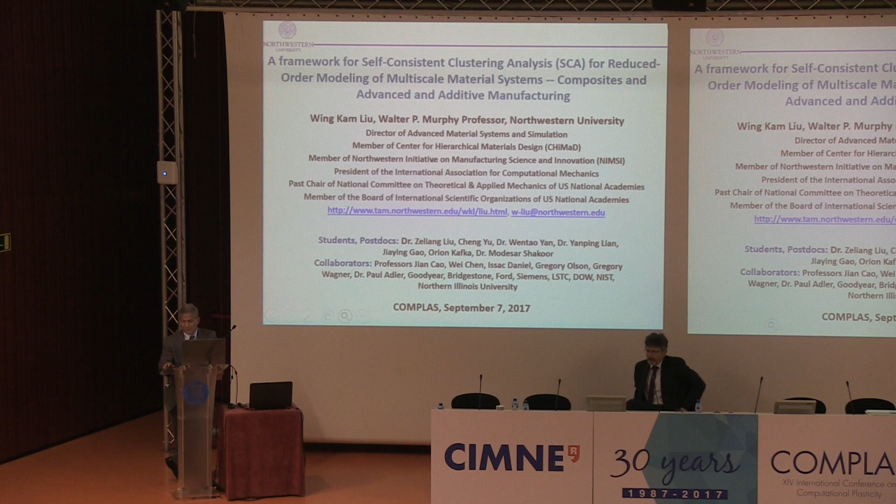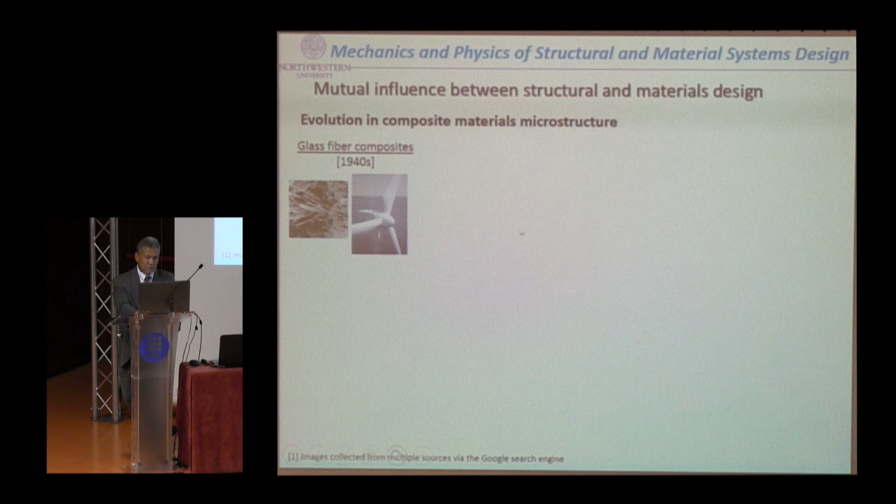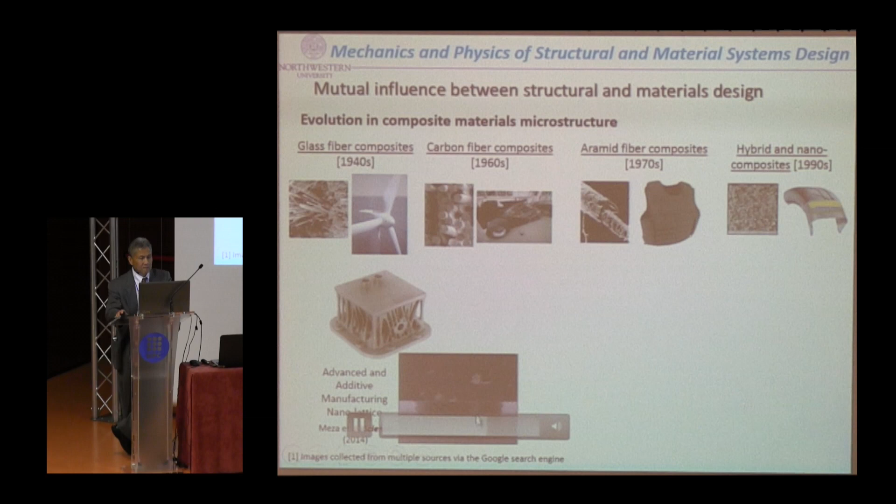So I will give you some idea what it means, how mechanics and physics can apply to microstructure systems. You can see the evolution of composite material, how they evolve as a function of time. You start from a traditional material, I wouldn't call it too traditional, say fiber composite, all the way to nanocomposites. And now we really want to look at the nanoscale using additive or advanced manufacturing technology. This one is based on work done by Caltech, and the diameter of this truss system is around 10 nanometers, a very, very small scale system.

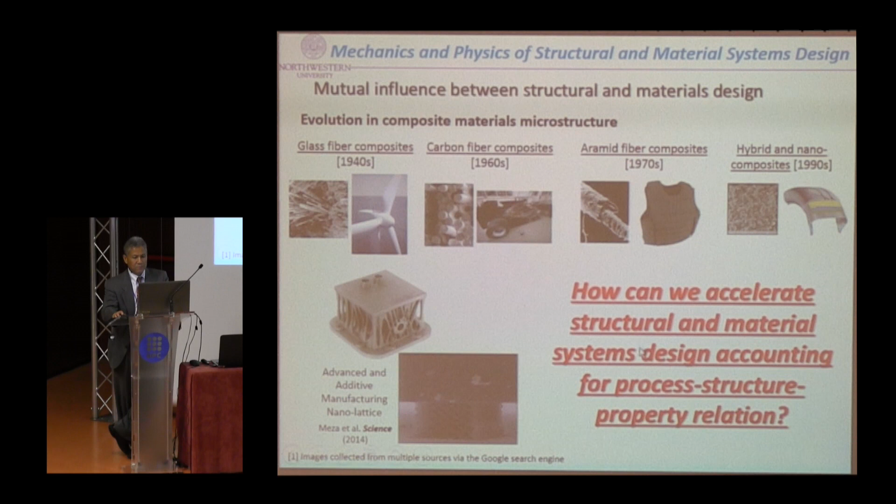So the question would be, how can we accelerate structural and material system design accounting for process structure property relations? That's the goal of my talk.

So I will start with talking about something called the data-driven approach. This is a theory that we borrow a lot from micromechanics called self-consistent. The clustering is a lot more based on imaging technique, data compression techniques. We're going to combine both of them together to demonstrate how we're going to look at microstructural response based on large deformations and so forth.

Of course, this creates a lot of data. I know that data may be a buzzword, but I believe there is a good application in mechanics or material science because we are focused on process. If you change a process, you get the microstructure, and the microstructure will change your properties. So that creates a lot of data.

In fact, when we talk about material, basically it's a database. That's the reason why we talk about data, because you cannot just make it up. It depends on how you process material based on thermodynamics, what composition. It has to be a material database so that you can use the information to predict the microstructure.

So the objective would be, if you have such a complex data structure, how can we effectively and accurately predict the nonlinear history-dependent response of this heterogeneous complex microstructure? But because this is so small, uncertainty quantification is very important because you cannot just do a deterministic approach. You have to go to a statistical approach in this problem.

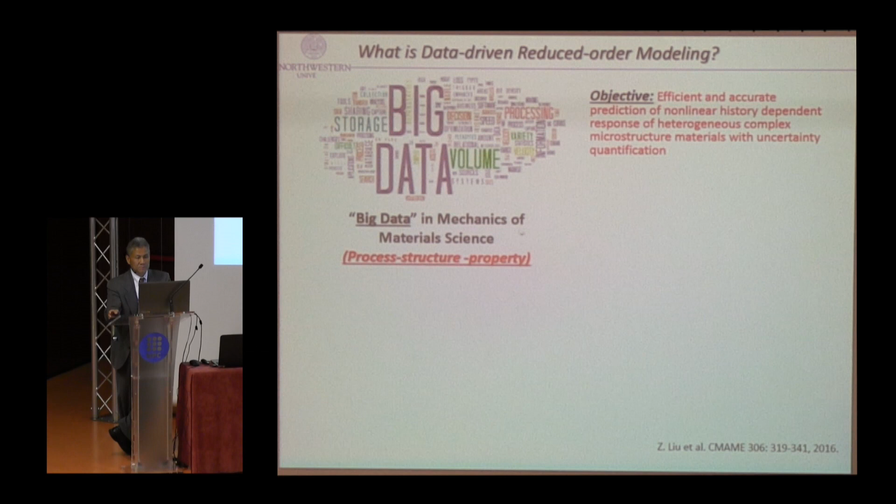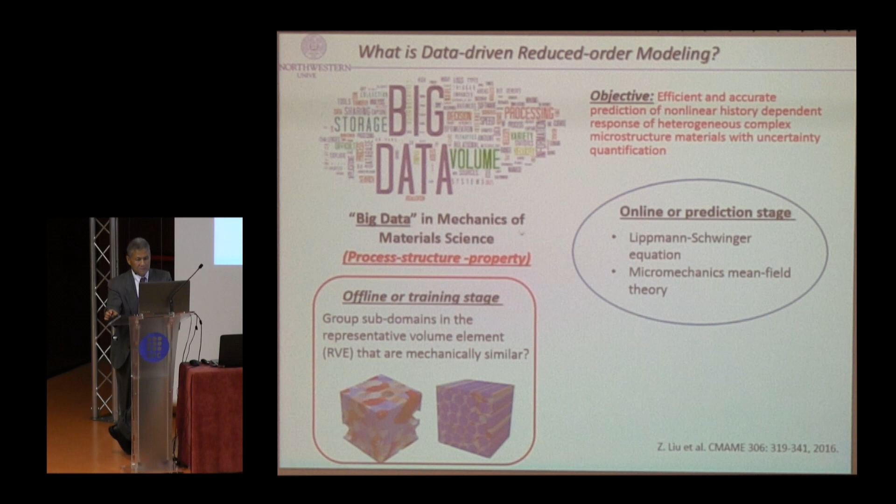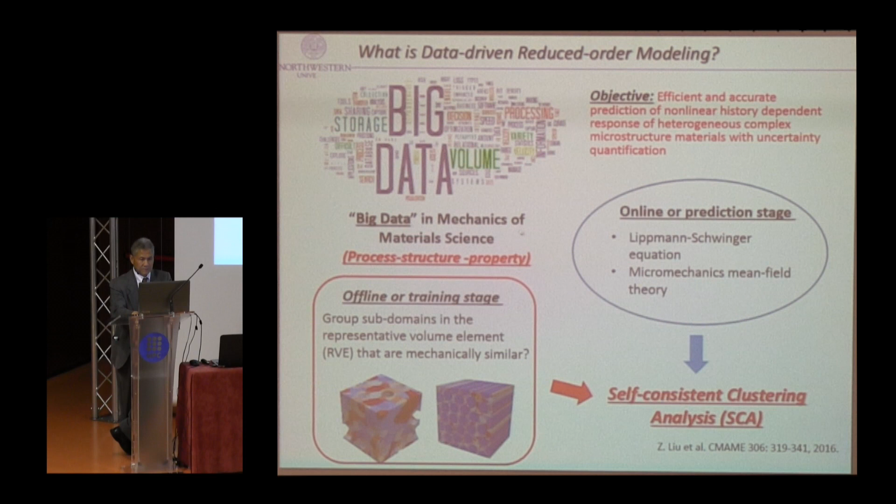So the way it works is you have data, and you look at the data, and you train the data. We're still learning a lot. We work with mathematicians on this one. We call this the offline or training stage. And the second one is called the online or predictive stage. For micromechanics, in particular for mechanics of material science, we use the Lippmann-Schwinger equation and also micromechanic mean field theory. We borrow these two theories to do it. The whole idea is what we call self-consistent clustering analysis, called SCA. So that's the one that I will focus on, and then I'll give a number of applications in this case.

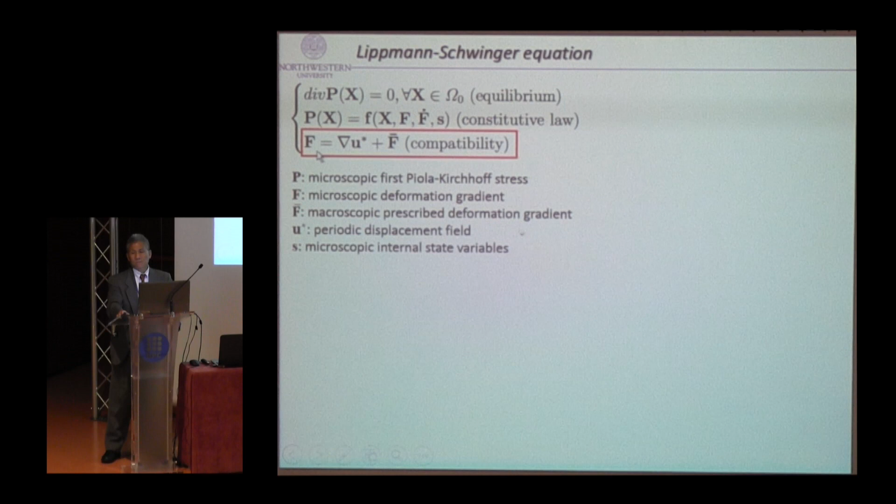Now, what is the Lippmann-Schwinger equation? Basically, we look at the equilibrium equation, the constitutive equation, and in particular I want to focus on this equation, which involves the deformation gradient. For the Lippmann-Schwinger equation, we look at this equation, rewrite it in a different form, make some assumptions, and then do an iterative scheme and try to do the corrections. This theory started, we learned it, in 1950 from this paper. That's the reason I call it the Lippmann-Schwinger equation. But then it was converted into mechanics from a statistical mechanical point of view in 1972.

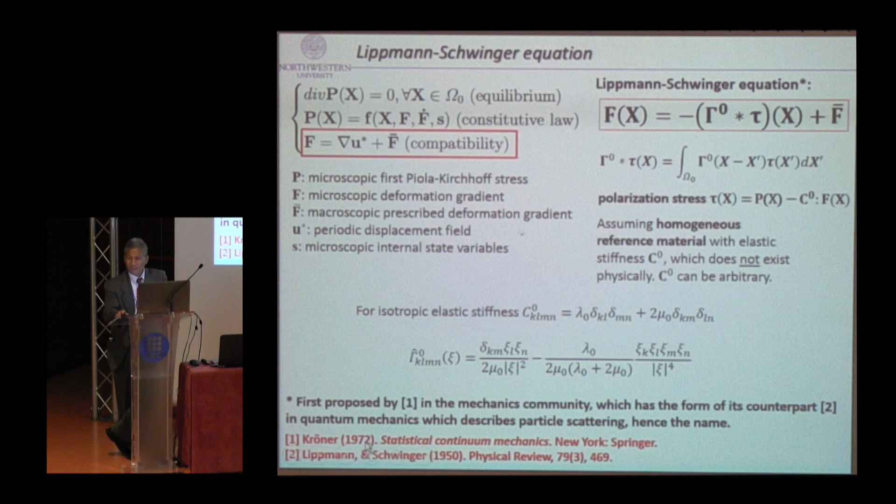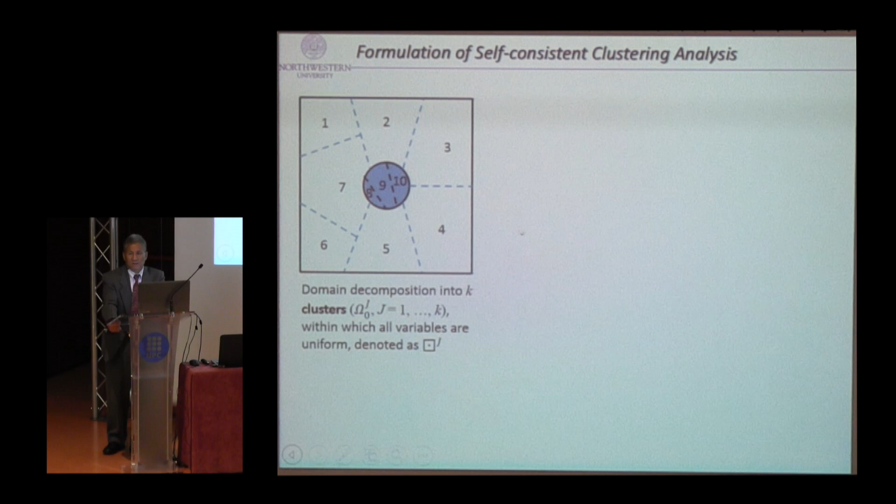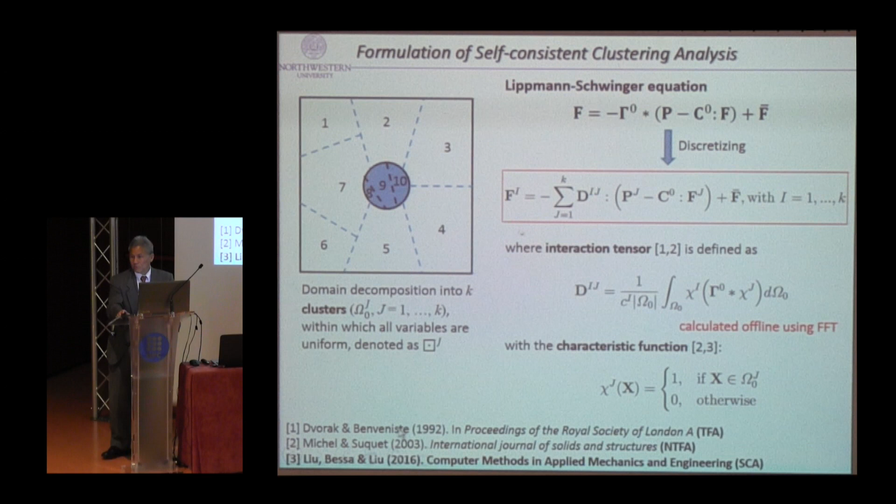Now, the second thing is called clustering. The whole idea is we want to cluster the data such that, instead of looking at all individual material points, which we do either by FFT or by finite element calculations, I want to group the data in such a way that they have similar behavior, similar mechanical response. There are different ways you can compute it. Based on this Lippmann-Schwinger equation, you describe this equation, and using micromechanics, you come up with the interaction tensor. I will give credit to these two papers, which I learned a lot from.

So now we can put it together based on data, and I'm going to describe briefly what is meant by training and prediction. For example, I want to solve this system, which is 300 by 300 by 20 in a three-dimensional structure. Look at how the response of this actual carbon fiber composite is idealized.

And if you just do it by finite elements, it takes about 80 minutes on 24 CPUs, using domain decomposition. There are a lot of clustering techniques that we have not studied, but we just use one called k-means clustering. Then you come with the interaction tensor, how this interacts. Based on this, from that many degrees of freedom, I go down to 32 clusters. I can look at a similar response within 1 second using one CPU. So the speedup is tremendous in this case.

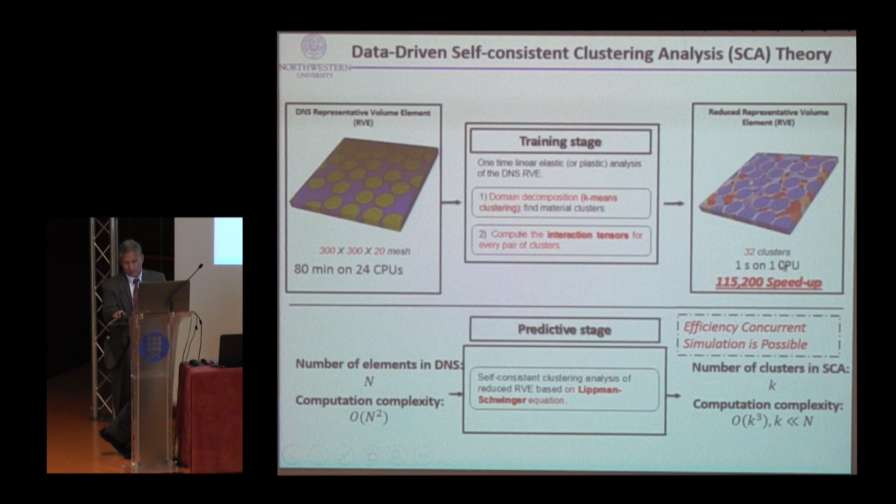So that's the way we compress the data. Look at this data, look at the similarity equation. Now I want to do a prediction. In the order of computation, instead of n squared, because of this, it will be k cubed. Now the k is pretty small. For example, this is n, and this is k. So that's a big difference in computational time in this way.

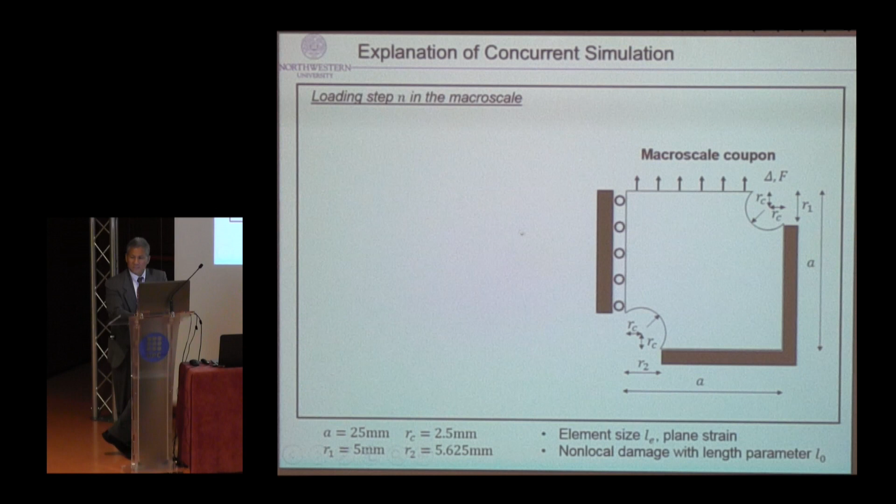Let me give you some examples, in particular for soft material. We borrowed the idea from FE-squared, the finite element squared technique. So basically, this is a macroscopic response, and we discretize it with lots of Gauss points. I loop on the step, and at each Gauss point I compute the microscale. For solving the problem, I need to break it down into three steps, and then I take a homogenization scale and feed it back. So that's one computation, but this one can be pretty large.

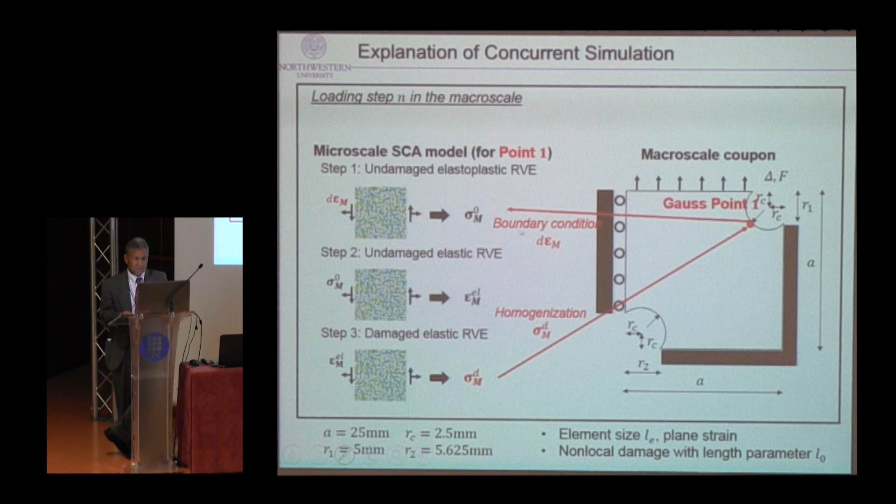For example, for this system here, I'm using 1200 by 1200 in the plane direction, times 10, 20, 30, and so forth in the other directions. So it's a huge amount of computational power, but we do this offline. We compress the data, and now I can do it much faster, looping over every single Gauss point. And that's the procedure that we do.

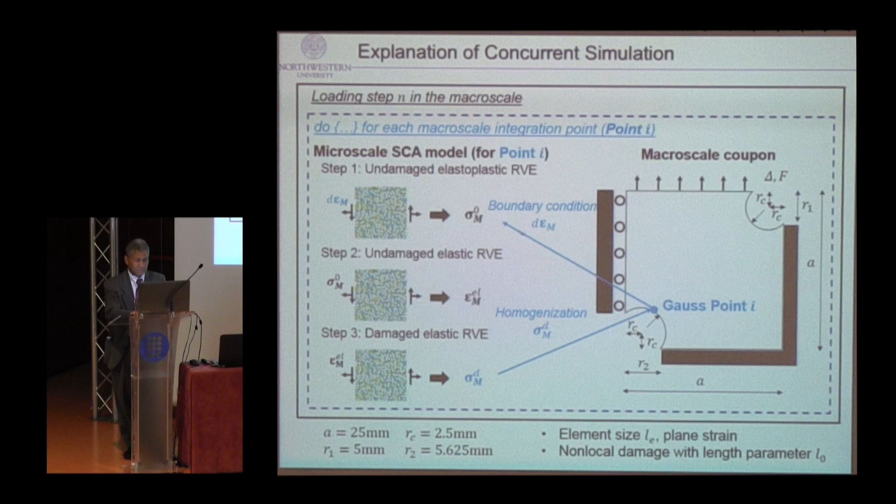So basically, we assume a statistical distribution of the microstructure. The key thing is how you can actually loop over the whole system. Of course, if you know the location that's important, you can just take that part. But just to demonstrate, we loop over every single point. Let me give you an example. You don't need the constitutive equation, but you do need the constitutive equation of the individual phases, and the mechanics, physics, and chemistry of the interface. Now I can compute the constitutive equation on the fly, before explicitly talking about the equivalent constitutive equation in this case.

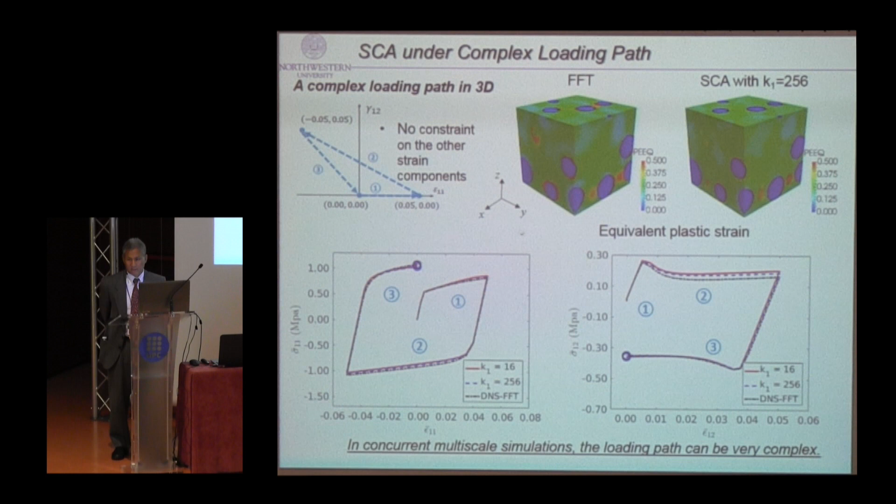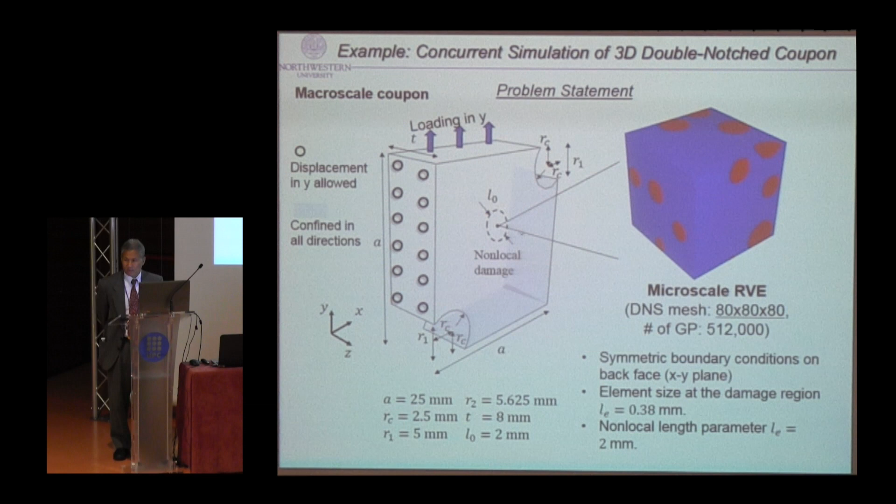Let me give you one more example in three-dimensional calculations. I'm doing a simple problem with crack propagation, 80 by 80 by 80, with about 512,000 Gauss points. If you look at the computation case, this is a finite element calculation with 154,000 elements, say 1-point integration. For each RVE, I'm talking about 512,000 Gauss points. If you multiply that, that's the computational cost you need for direct numerical integration, direct DNS calculation.

I'm going to do data compression. I only use 10 clusters, and that is my computational cost. Based on this RVE calculation, if you compute everything like this, it takes about 10 to the 5 days to do the calculations. And I can do this in 56 hours on 72 CPUs. The speedup is about 43,000 in this case.

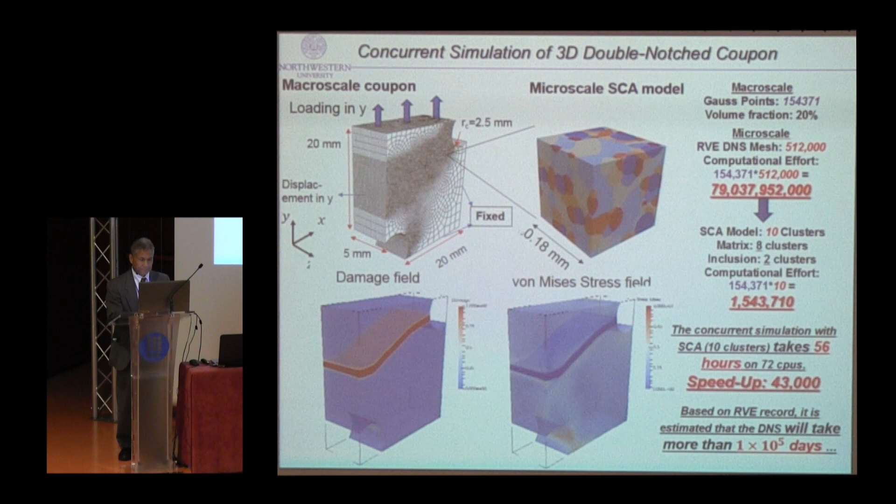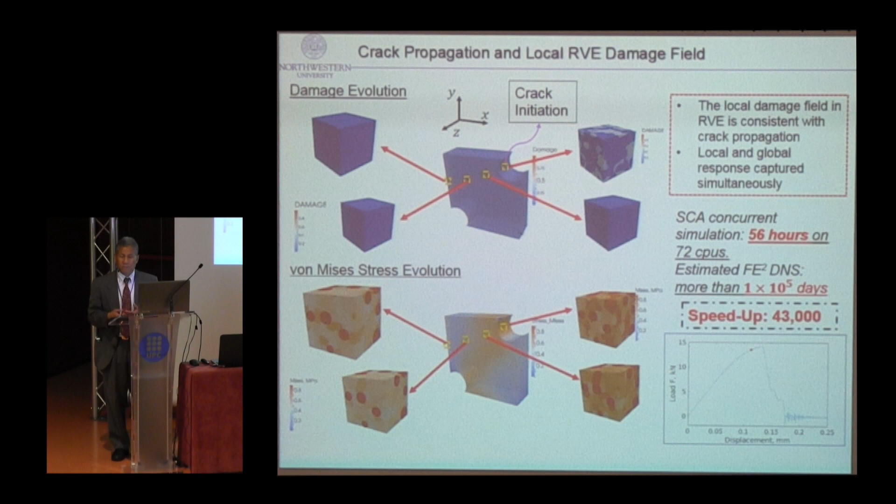Not only that, we can actually look at each Gauss point to see how the microstructure evolution occurs, because that is where we're interested in the initiation of damage, so that we can design a material to minimize the damage. You can look at the load-deflection curve at the same time, look at damage, look at stress distribution, and that's where you can try to come up with the design of the microstructure on the fly.

Now we're working on another project on unidirectional fiber composite.

I want to model every single composite on this particular frame. This work is together with Ford and Dow Chemical, and our goal here would be to model the detailed microstructure of this system. The problem is we don't have that much data, so we need to do an inverse problem.

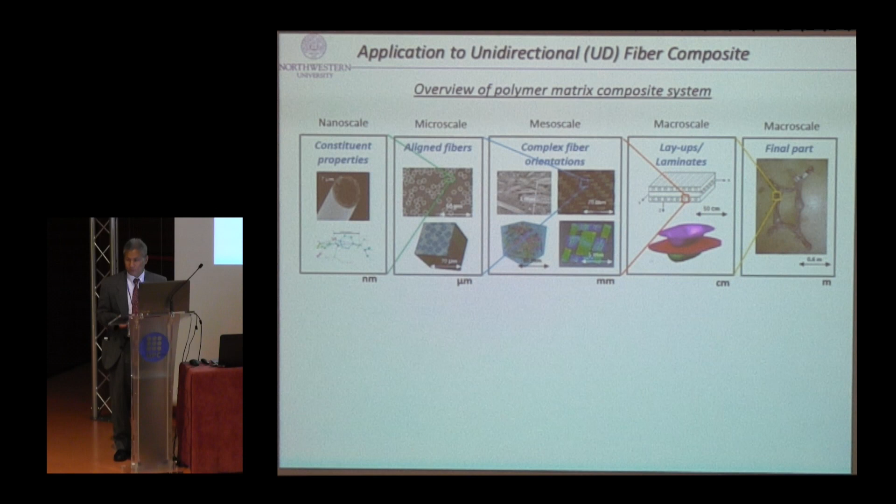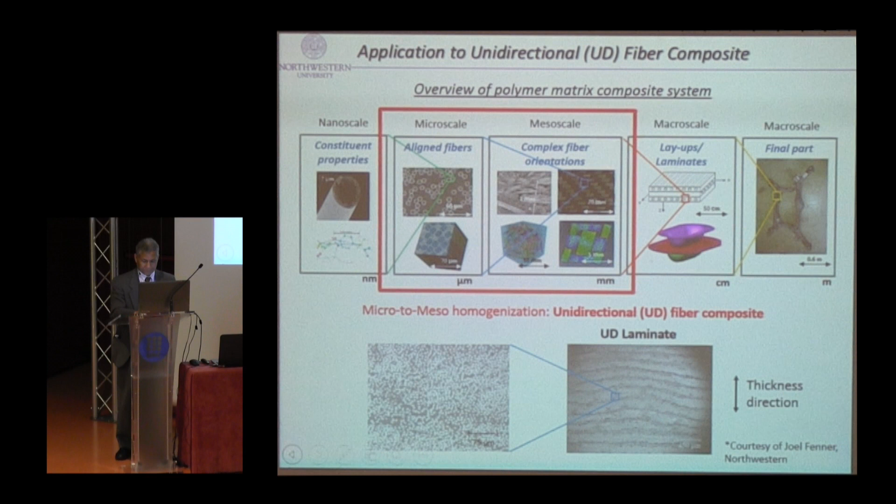To get a statistical distribution of the microstructure. The whole idea is we want to model every single detail. That's the whole goal here. Then you can design experiments to calibrate your model, and do prediction of different combinations of the microstructure.

So this one is a 22-ply system with different angles. Our goal is to model the detail of the statistics of this microstructure.

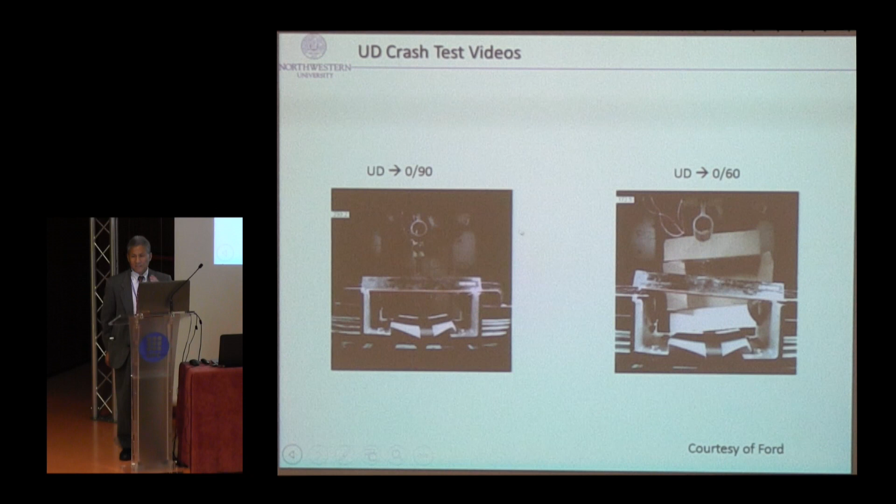Let me give you an example of what this means. We can do a lot of imaging, but this is a very expensive imaging, and this is something we work on, how to do this equivalent statistical description of one patch.

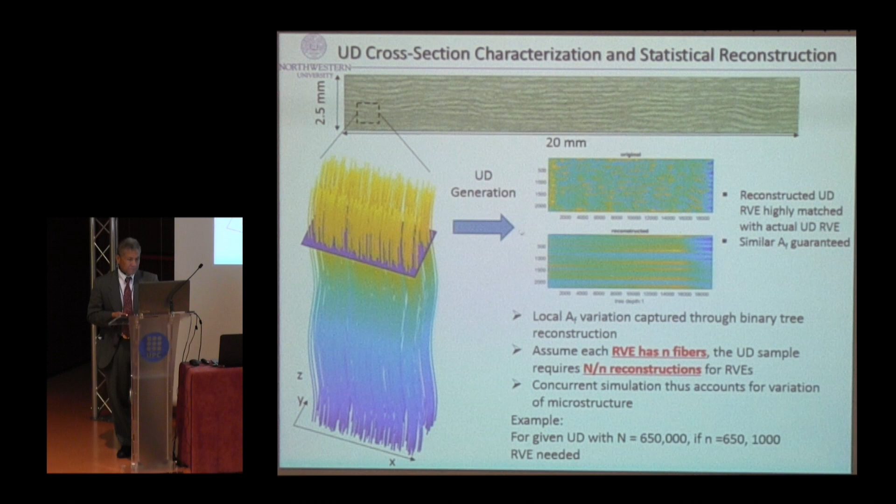So we are doing a lot of experiments, and this is the first prediction on it, just a test system. But we also look at a lot of different kinds of experimental techniques.

The problem is they cannot really see what's inside the microstructure, unlike in metal, where you can see a lot more. So we still need to think about how to actually predict the internal delaminations, and also the imaging for this.

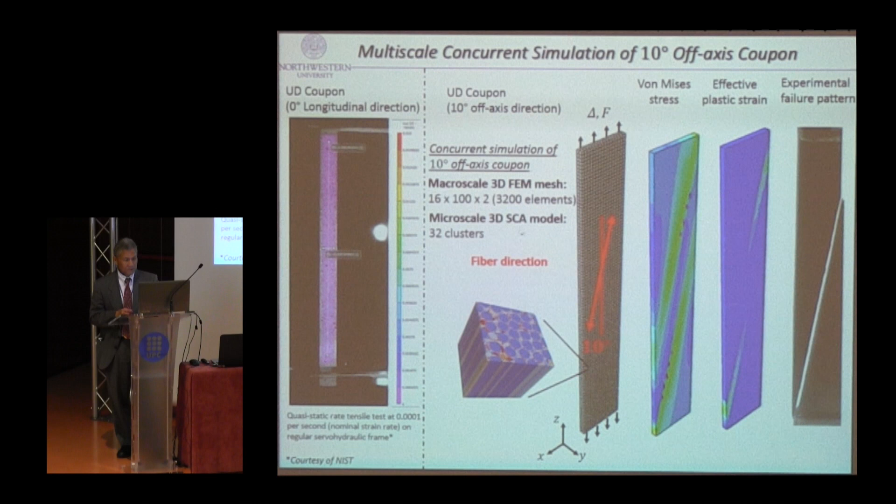Most of the micromechanics or mechanics can do is for low cycle fatigue, and you can see how this comes about. Usually you assume a crack, and you see how it goes, but mostly it's like void growth and coalescence. It's a pretty well-known way to look at a problem.

But we want to look for the incubation cycle. That means we're focusing on high cycle fatigue in this particular problem.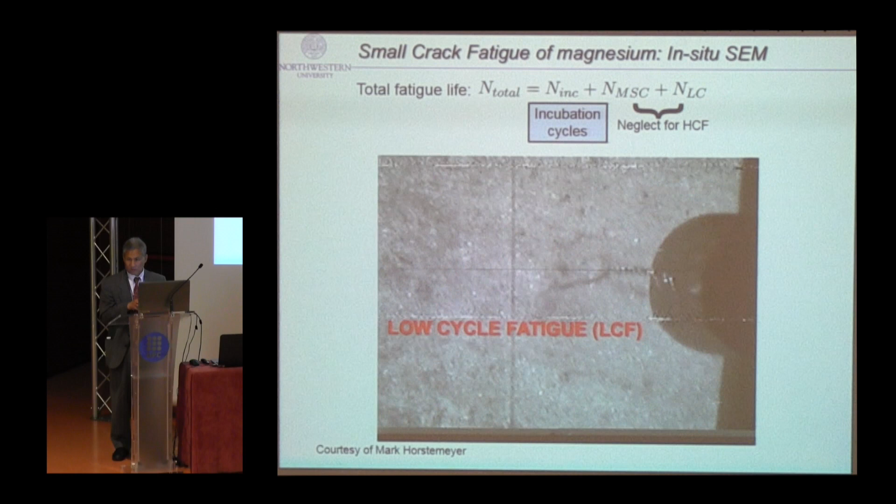But this one is a low cycle fatigue. You can see how the crack initiates. They're not a straight line, they actually follow the microstructure, how the microstructure interacts. And that by itself is a different topic that we can talk about.

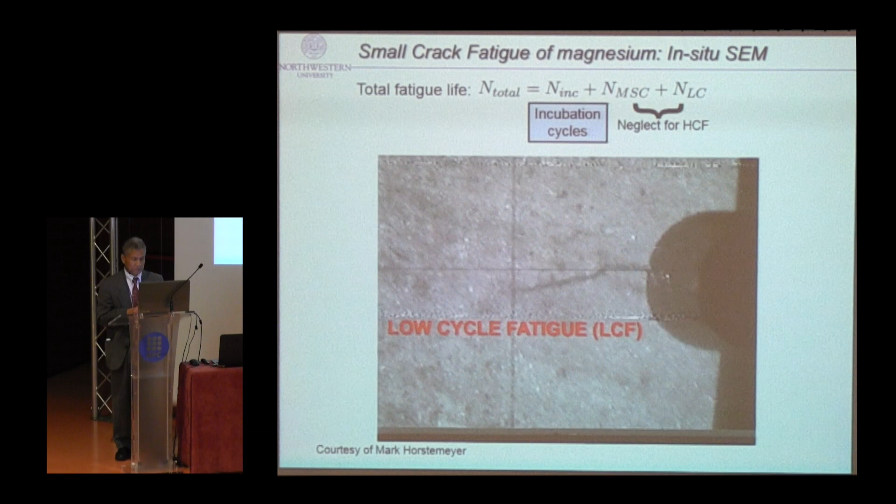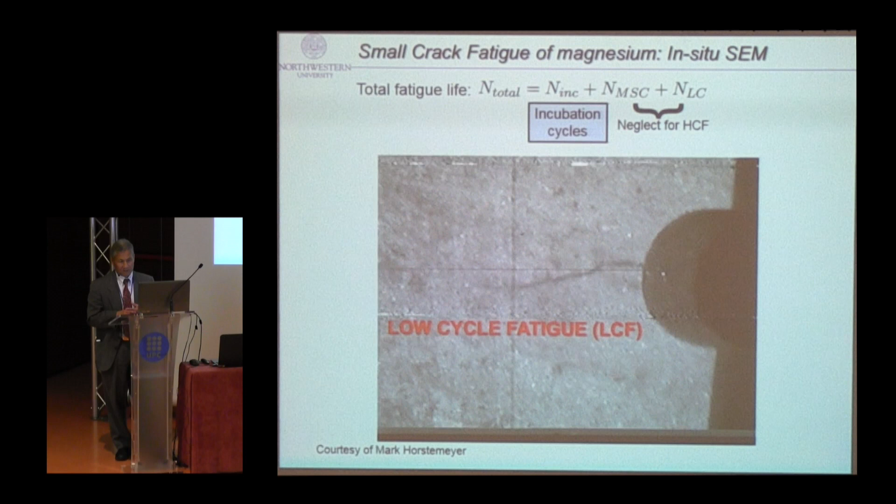How do you compute this efficiently, predict the crack propagation for this? But for high cycle fatigue, we can talk about 10 to the 15 to 10 to the 20 cycles, which is 15 to 20 years. So you cannot just use this technique to solve this kind of problem, you do a different way to look at it.

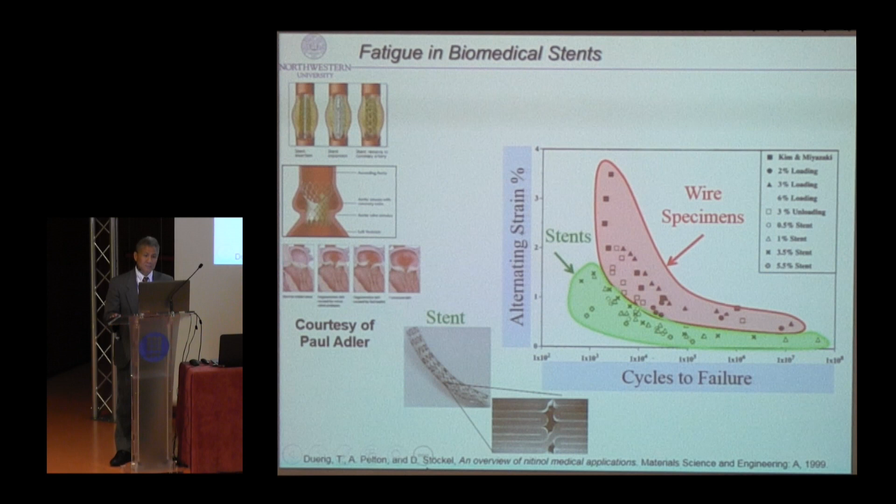Our application is a lot more on biomedical stents. If you look at the detail, using a wire specimen versus an actual stent, because of the geometry and the microstructure, it is not that easy to compute this particular system.

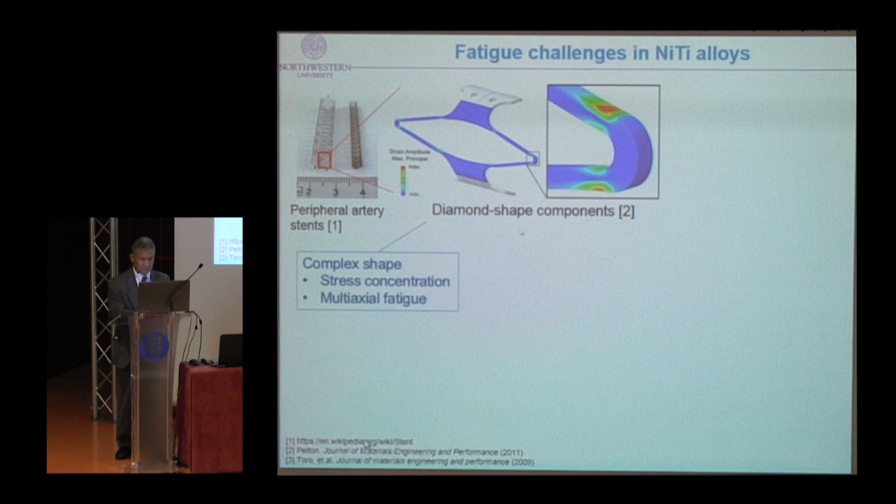Let me give you an example of what this means. That's a typical stent, and it's a very complex geometry. We assume in the region, this is complex shape, stress concentration, multi-axial fatigue. When you go down into it, you have a lot of defects.

When you go down further, you have something called stringer, based on manufacturing. So basically you need to simulate all this process and look at how to predict the incubation period and fatigue in this case. So it's a very complex problem.

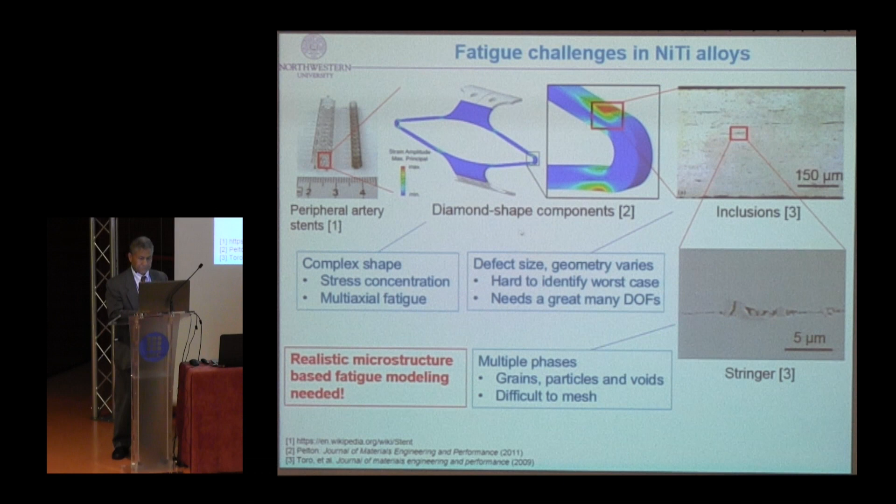And you really need to do realistic microstructure-based fatigue modeling. Now we have looked at three kinds of modeling. One is basically a traditional one, you do the traditional casting, melting, and extrusion.

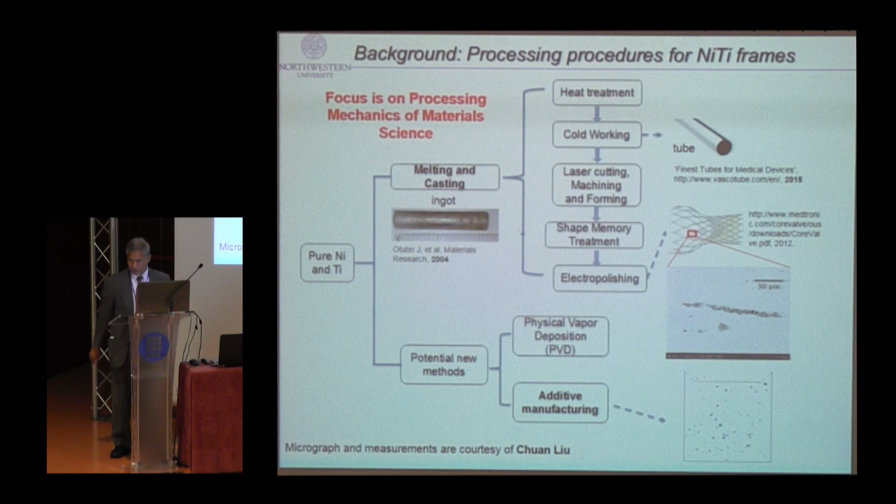And then you look at the microstructure, and from there you can predict it. The second one is using physical vapor deposition, and the third one is on additive manufacturing. So let me just focus on additive manufacturing in this case.

So we do a dislocation-based crystal plasticity. These are all based on plasticity, that's related to this topic here. We are focusing on this incubation period, there's a theory on this.

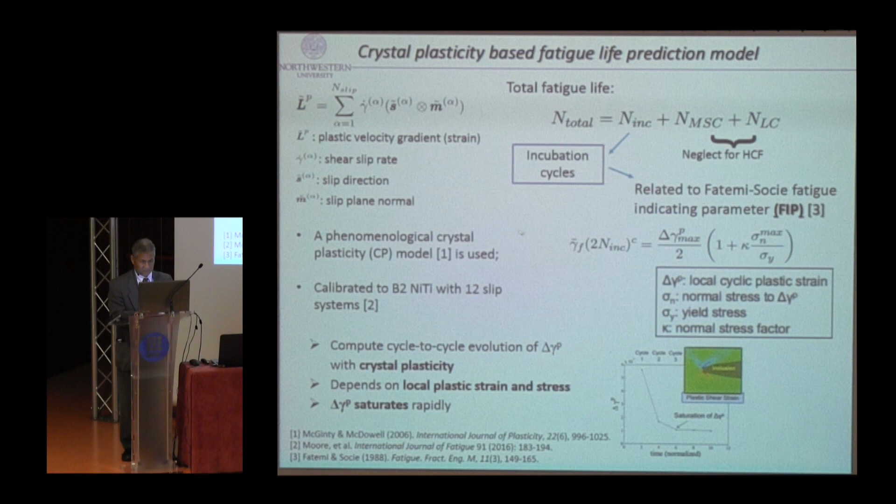The question is, how can we actually predict fatigue life in this case? So this is something we have done, you can actually look at the microstructure of the system, and we apply this SCA method on it.

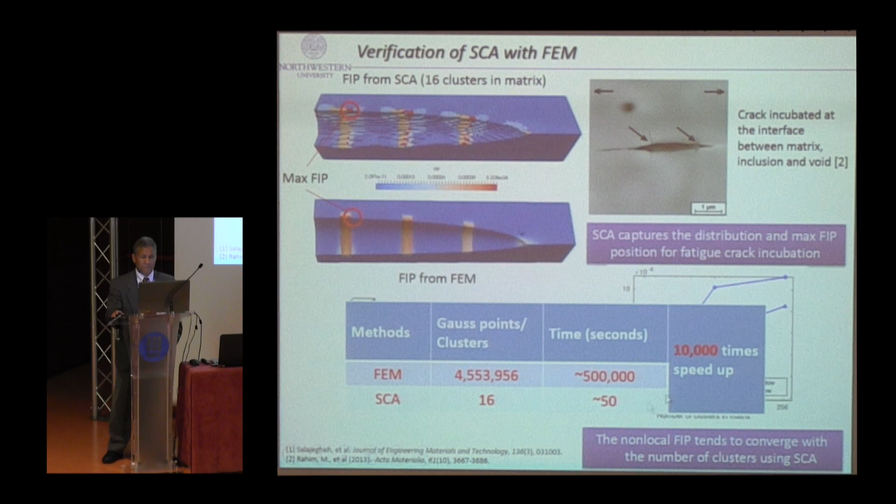Based on our calculation for this small cluster, we are talking about many degrees of freedom, and we can get a speedup of 10,000 in the computation in this case.

So this is something that we work with Siemens on how to apply the NX CAM system to do hybrid manufacturing.

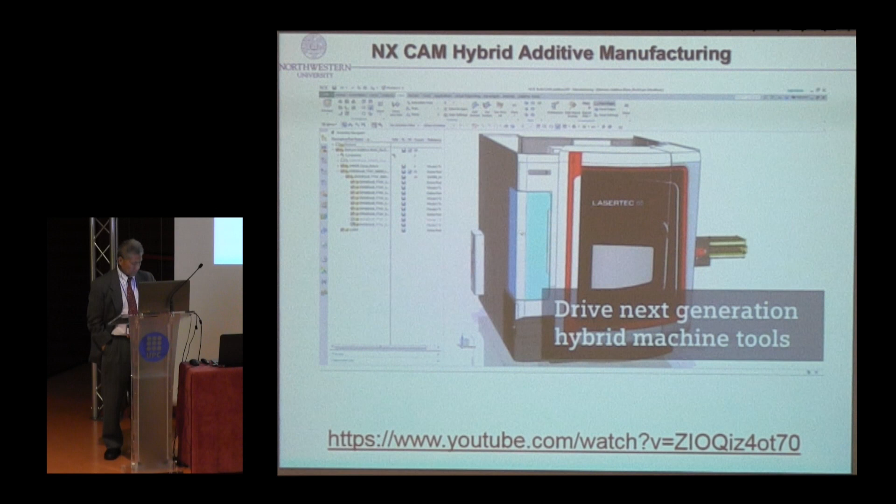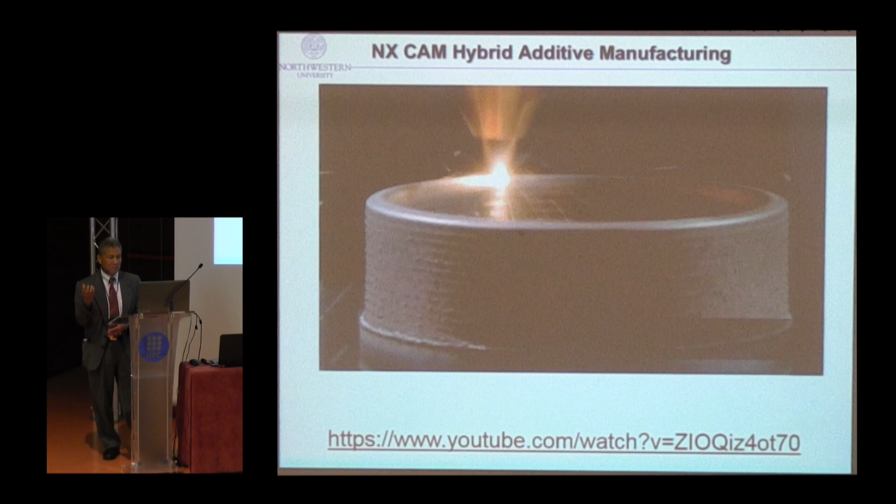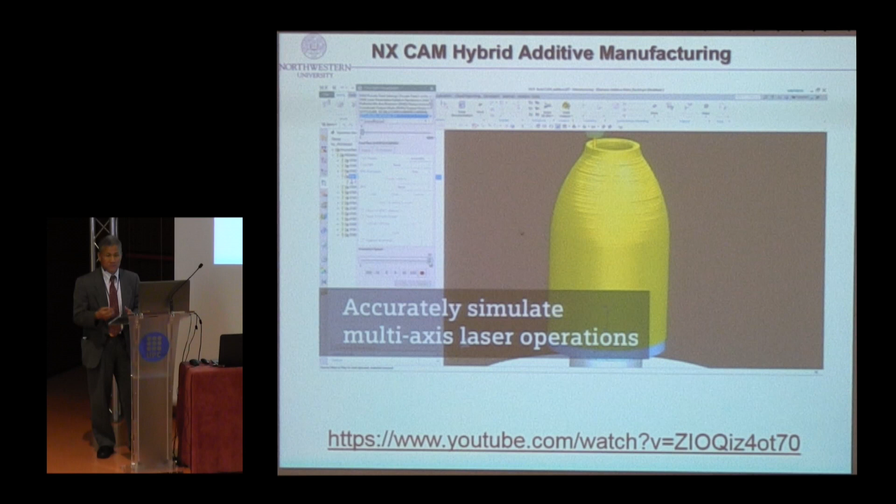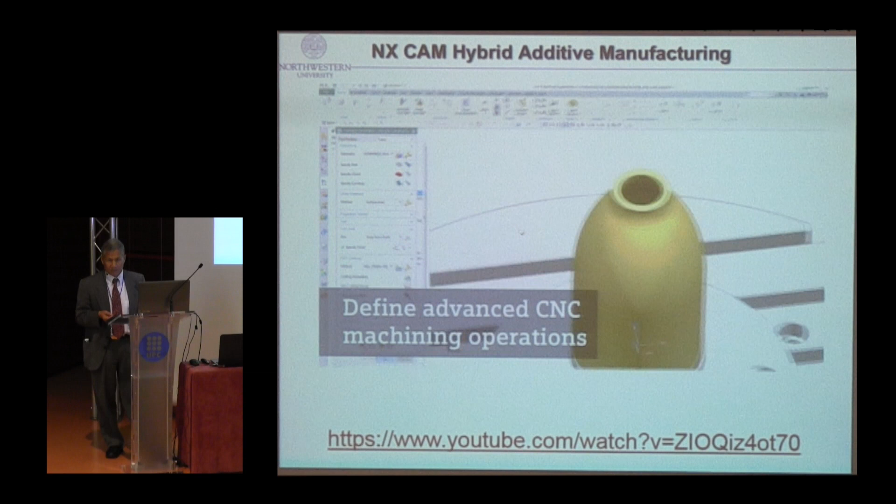So it's all computer generated. You can get a geometry pretty accurate. However, what is inside the material when you make it? What is the microstructure? How can you control the microstructure? And from that, the process change of microstructure - that's the reason my database is so important in this case. So you do experiment, do simulations, and do online monitoring, feedback control to control the microstructure. Now, of course, this is a framework that we're working on. It's not easy, I didn't say we got it done. But for 2 parameters, we know how to control it. Once you have more parameters, it is not easy. So that's the reason why we create a lot of database on this particular system.

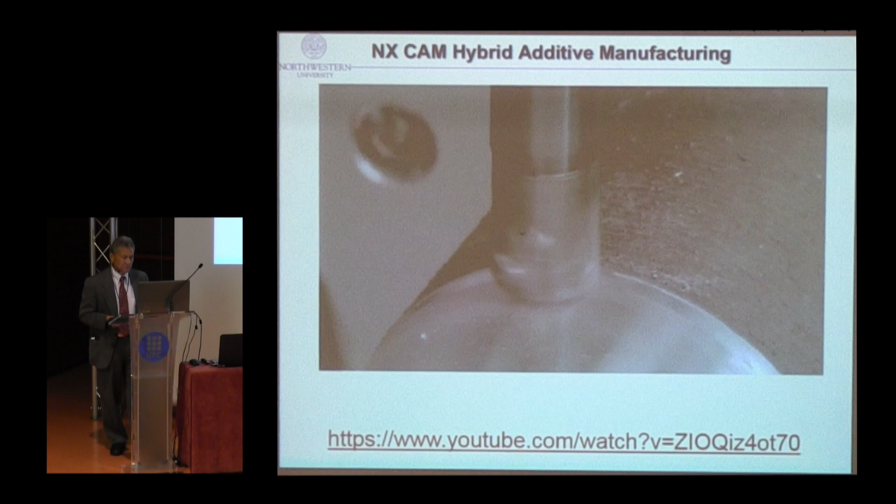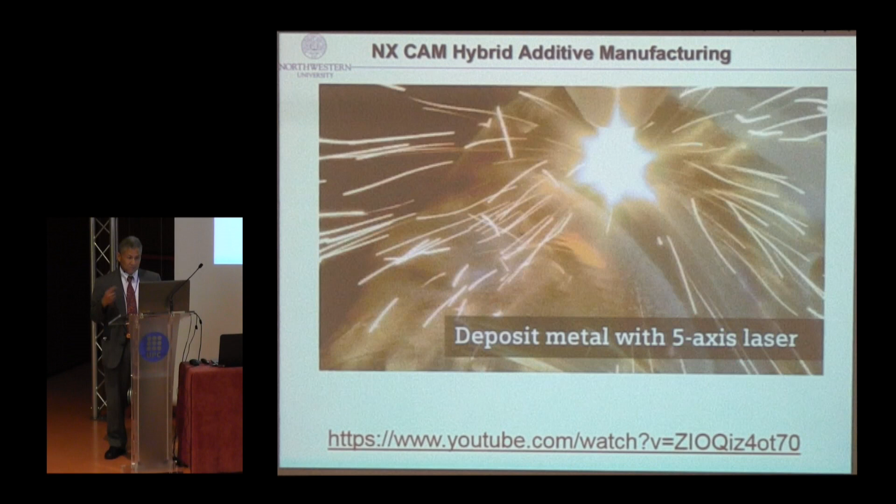But in terms of the classical manufacturing, these are well established. This is a CAM system. The question would be where do you monitor the system? How do you actually control the microstructure that you cannot see in this case?

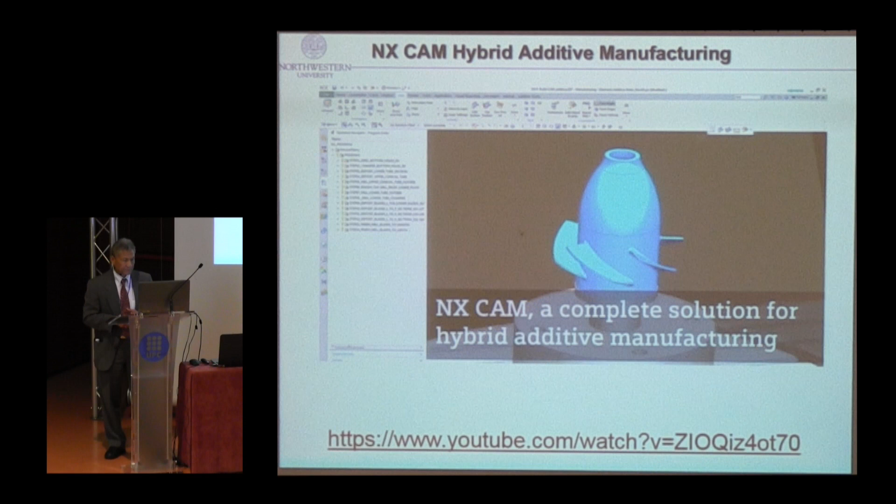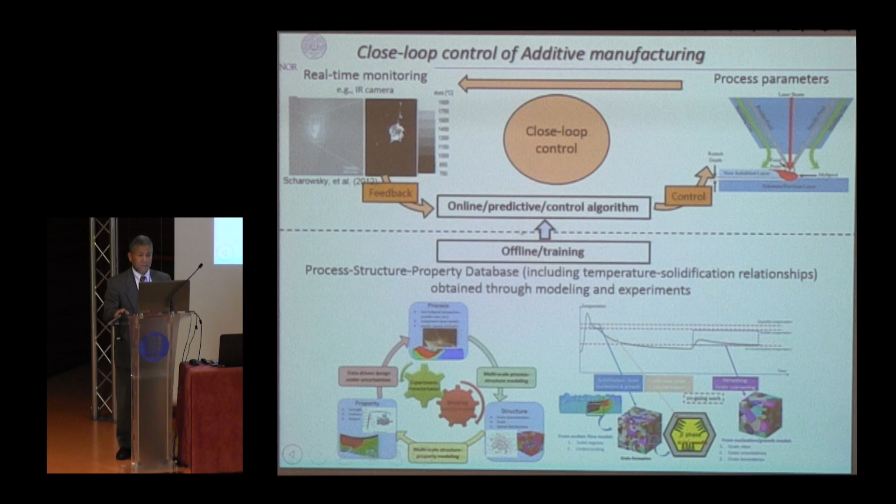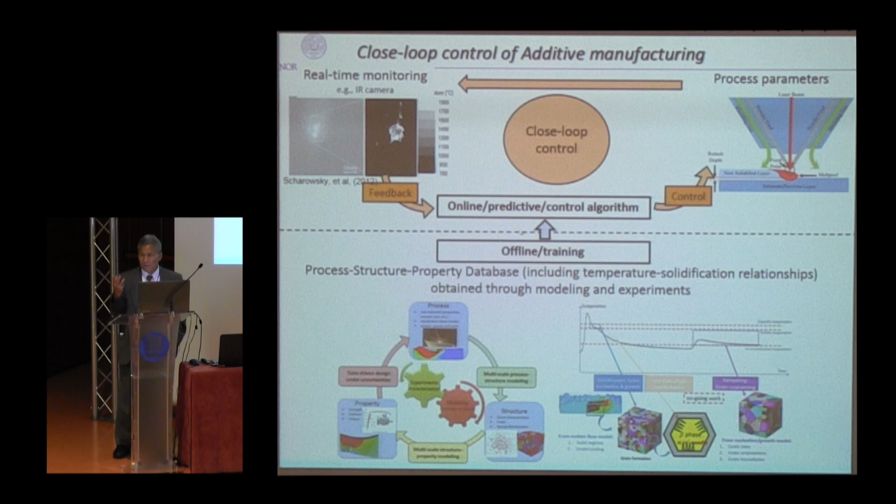So the whole idea, like I said, will be you have a lot of process parameters. You want to do a closed loop control, you need to do online monitoring. And the way we do it would be we do feedback control, but at the same time I need a lot of database. And the database based on a lot of thermodynamics, because of cooling rate, heating rate - all these are experimental database that you need to look at. So we look at the temperature, time history. That's one very important parameter that we look at. And this is the framework that we're working on.

Okay, so we have a lot of modules. So we basically do a lot more on the mechanics part. On this part here, there's a lot more material science on the grain growth, dendrite growth. And we've come up with process, structure, and property prediction. In this case here is on fatigue.

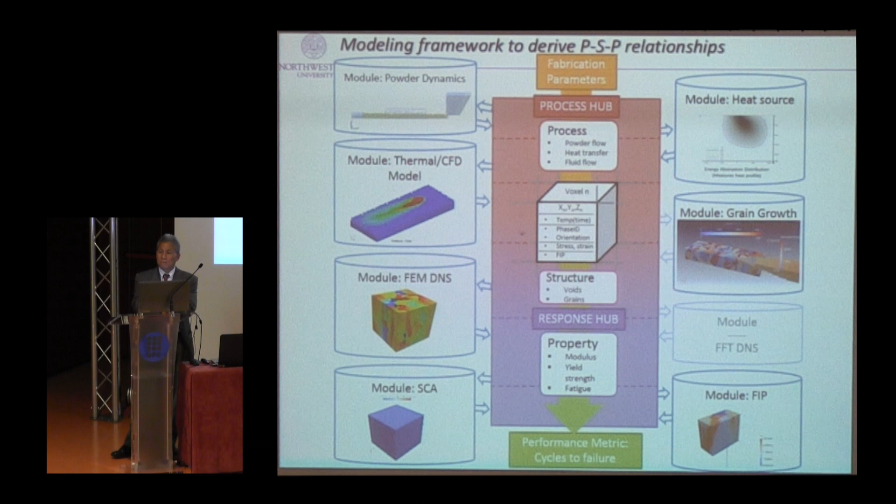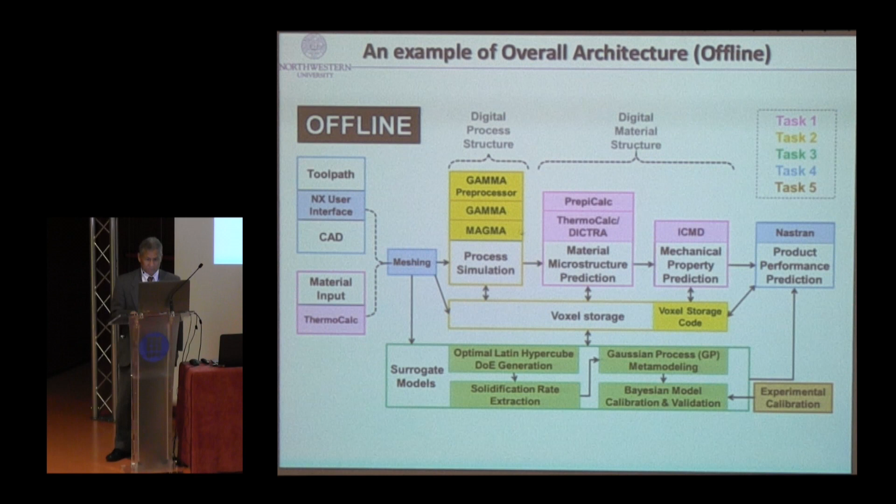So we are developing different modules, but the thing will be we do need to work with a lot of expertise. This is one form of what we are doing with a small company, Material by Design. There are a lot of different processes. We call this offline data, and we break out different tasks, and that is our online predictions in this case. So there's a lot more than that we can learn. We are learning quite a bit on this thing here, but computational mechanics plasticity is very important in this particular example. Now, I'll give you one example.

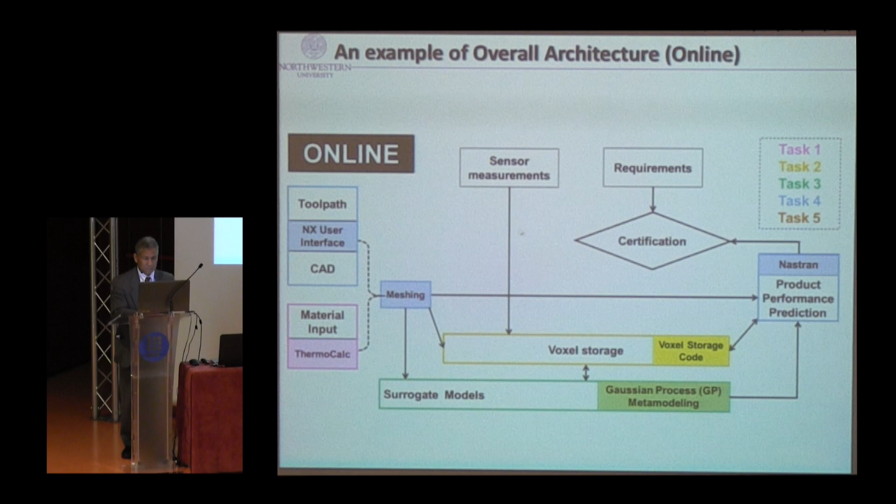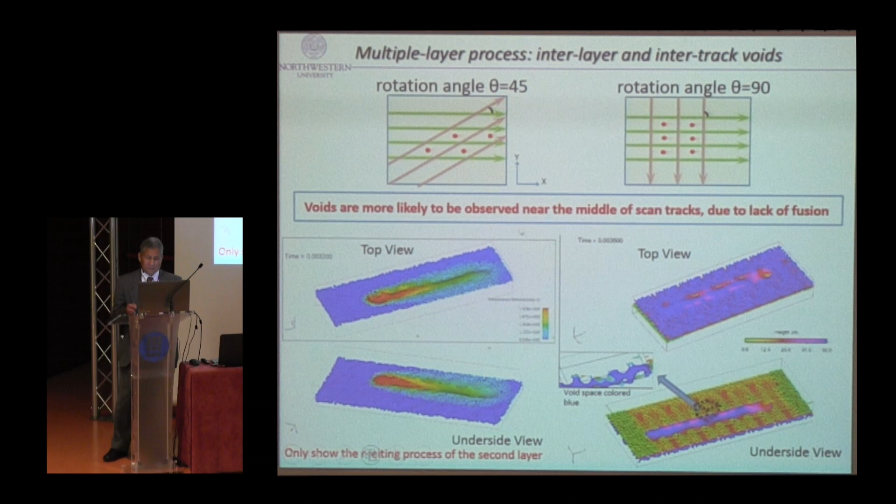How we do would be we put a powder in. This is a powder bed system. You put a laser or E-beam on it. You try a different direction, you can see the void formation in this case. So we can actually know how to control, minimize void formation, but there are different kinds of void formation that you need to understand how to do it. Simulation definitely can help you to minimize the void formation. But there, like I said, there are different kinds, depends on the powder. There are a lot of physics that we need to learn about.

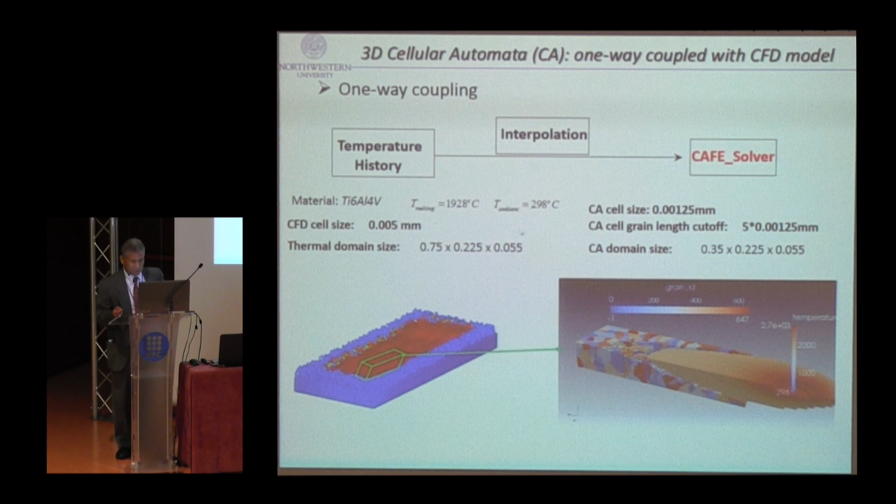And the second thing would be now we get this particular system. Now we'll look at the grain growth, dendrite growth, different phases of the material, so you have different material science aspects that you need to look at. So this one is called the cellular automata finite element method. It's called the CAFE model. Okay, and then now you put it together.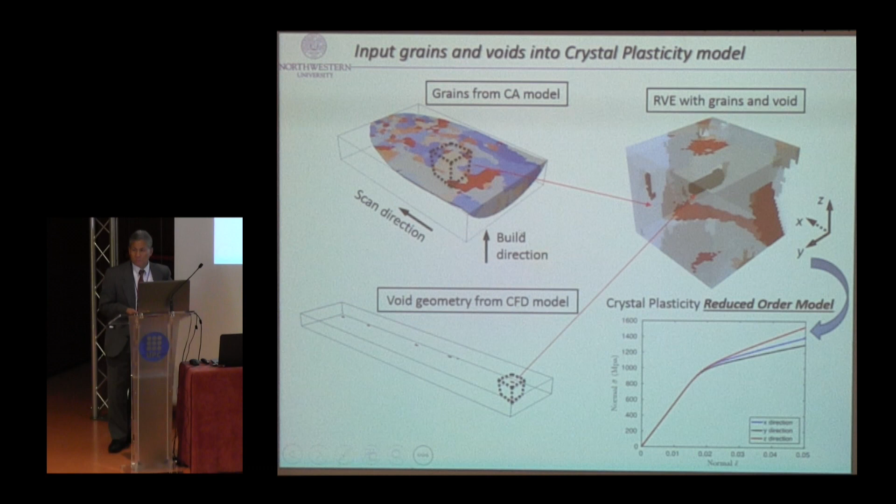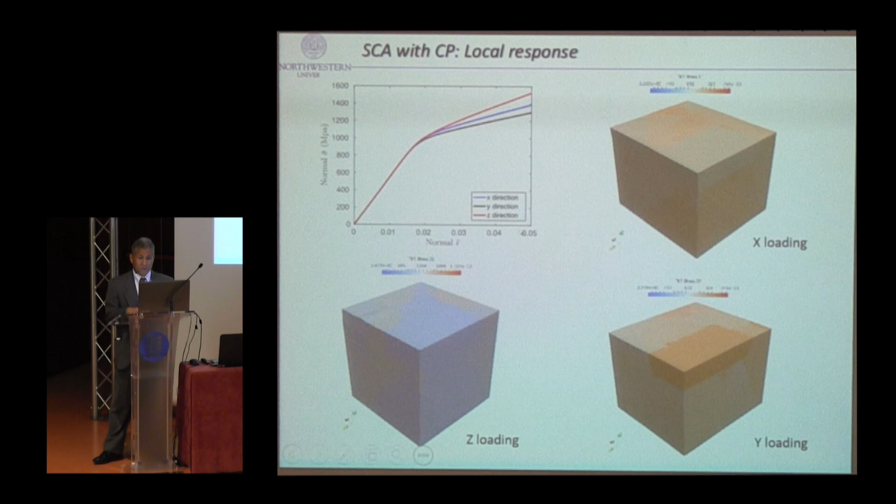You basically will look at the grain orientation, that's crystal plasticity, and you have the void formation, minimize it, and now you can actually look at using the reduced order model, which I talked about, SCA, look at crystal plasticity, and you can see here will be when you actually test it out in different directions, you get different stress strain laws in this case. But we computed it on the fly, based on the experiment, based on the computation in this case. Now we also do experiments.

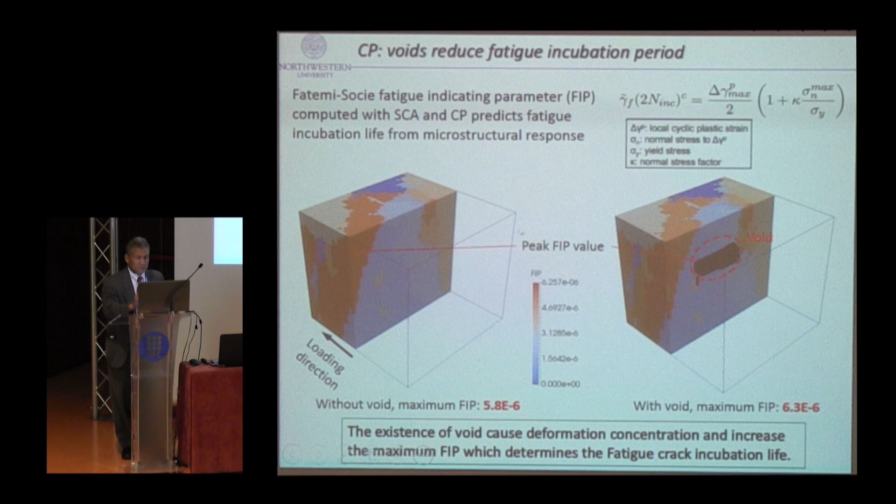This is just a fatigue theory that I don't have time to talk about. But let's talk about how to actually validate this using experiments.

So we went to Argonne. This is pretty expensive. We use synchrotron X-ray computed tomography, or also the EBSD. This one basically looks at voids only. Then you can do some other technique to look at different precipitates, different phases. So there's a lot of experimental data that we need to create from different processes in this case.

And then we look at, using this technique, EBSD, to look at the grain orientation. To do this is not trivial, from 2 dimensions to 3 dimensions. So you make a lot of assumptions on it.

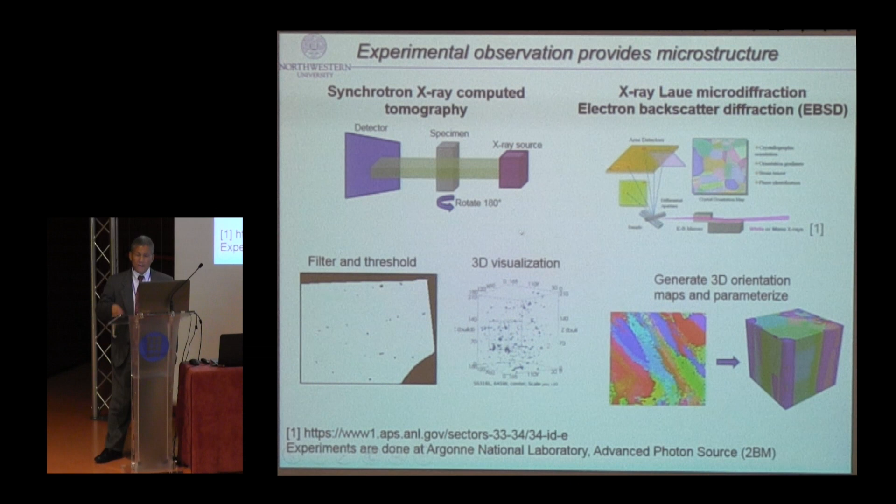And from there, you can put it together, the grain structure and the voids, and you do an offline calculation. You can do elastic or plastic analysis, data compression. You can do clustering, and then now you use the Lippmann-Schwinger equation to do online predictions. And now you predict the fatigue life, and you design your microstructure.

So that is what we do, not just design microstructure. You can also design the different phases that can give you the fatigue life that you're interested in, in this case.

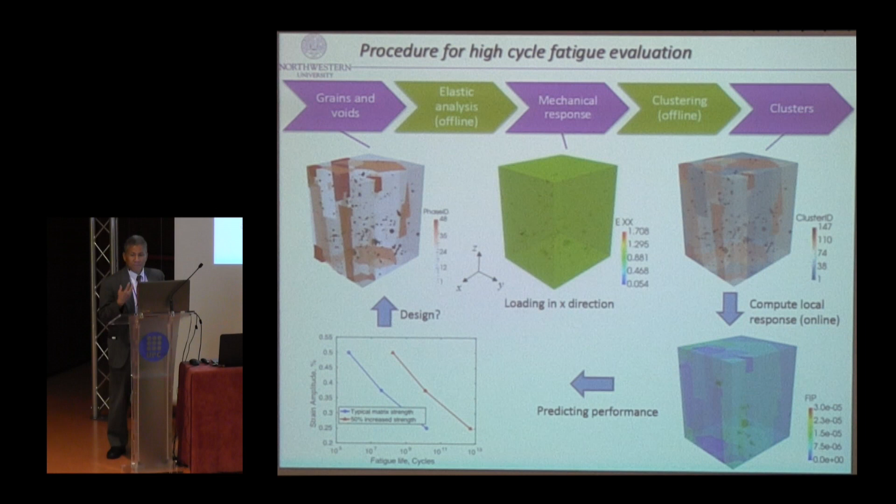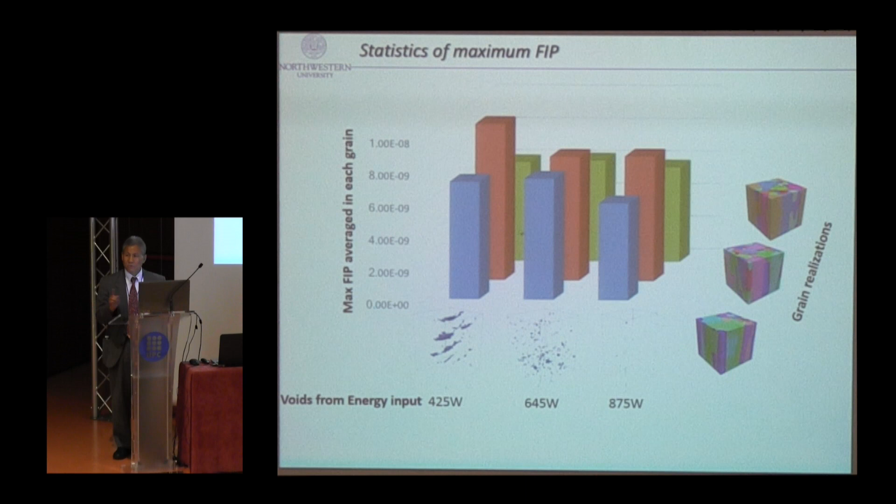Now, there are a lot of process parameters. I'll just give you one aspect of it, which would be input power. Input power is not well defined. What does it mean by that? Okay, but this gives you some example of a 2-parameter system, and you can see how complicated the system is if you really want to look at prediction of microstructure and do online monitoring in this case.

Both grain structure and porosity affect the fatigue crack incubation. Sometimes people believe that lower porosity does not necessarily result in higher fatigue life. The key thing would be it depends on loading direction, but it's a very complex loading direction because of the crystal plasticity, crystal orientations, and with void, there's only 2 parameters we are looking at, but those are 2 key parameters we are looking at.

But now we talk about different phases where you can see the design of the system is not trivial in this case here. So, like I say, data mining is one way, but we don't know how to use it yet. You need to do data learning, where we can learn a lot from experiment and from simulations.

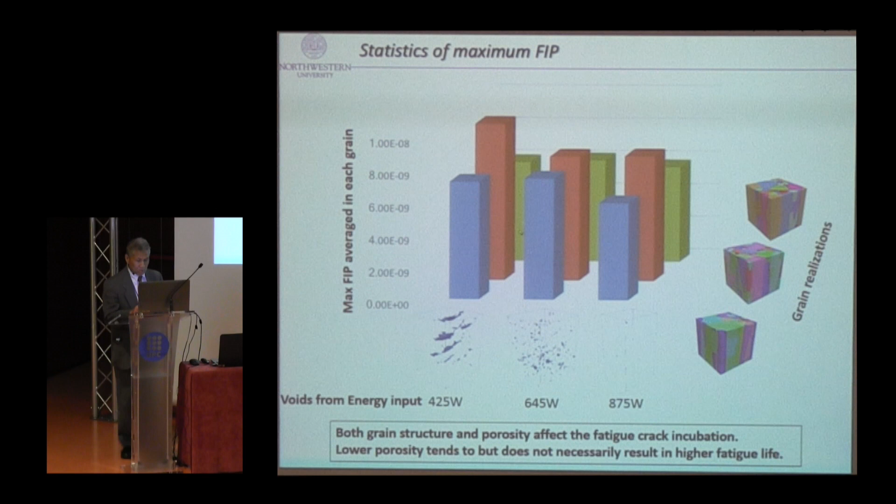And not only that, we need to compute it on the fly. So in this case, you have to use a reduced order model, but the reduced order model has to be mechanistic, based on physics, based on mechanics or material science. So that is the whole goal of this talk. And I'm going to give my conclusion because the chair said I have 5 minutes left.

The first thing I talk about is data-driven reduced order modeling. We developed a theory called self-consistent clustering analysis, based on classical micromechanics and the Lippmann-Schwinger equation, which we borrowed from quantum mechanics and converted into statistical mechanics. We also look at one aspect of clustering, but there are a lot of ways we look at. We have not explored that part yet.

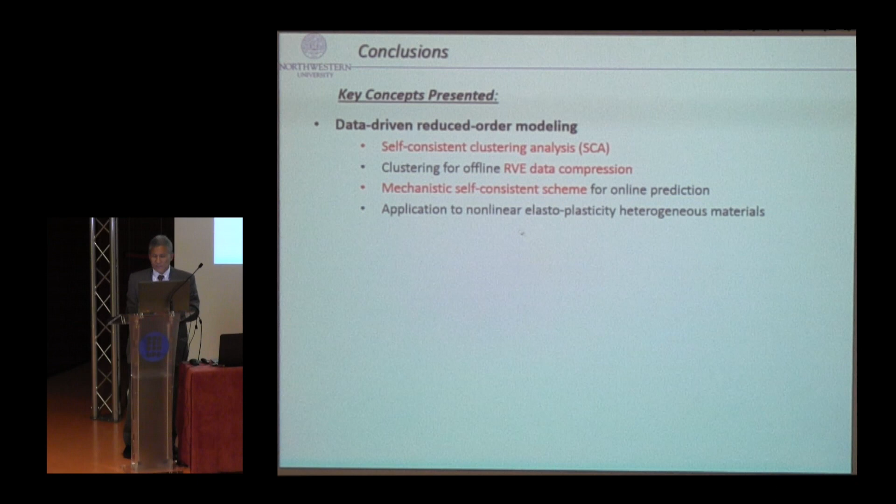Look at data compression. And we come up with something called the mechanistic self-consistent scheme for online prediction, just like the way we do in the real experiment. Hopefully we can do that. But this, you look at a lot of data, try to pick the right data to do the fast online prediction. I will show you some simple examples of it.

And I have not talked too much about what we might do for softening, which is a very complex numerical technique. For this, we come up with a method that we break down the RVE computation into 3 steps to bypass the softening numerical issue. So this is a numerical problem, not a mechanics system.

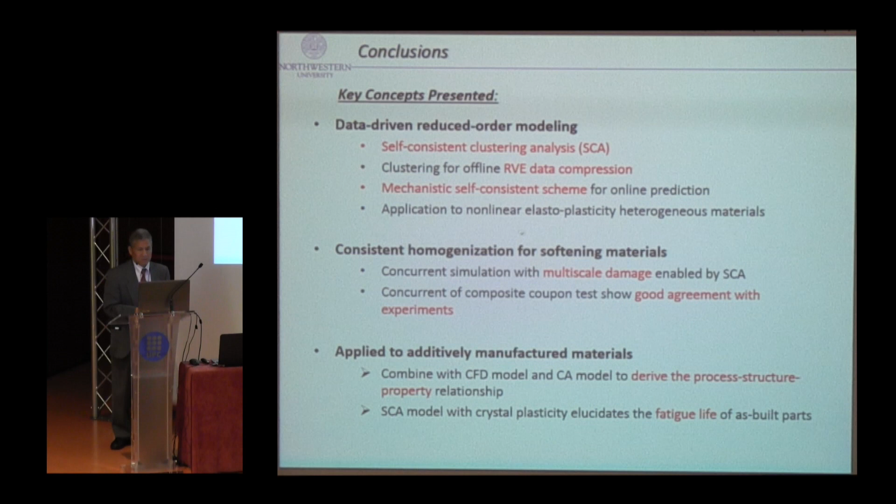And we apply this to additive manufacturing. In fact, it will be hybrid manufacturing. So we combine with CFD and a lot of other things I have not talked about, to derive the process-structure-property relations. But this has to do a lot with the material science aspect, not just computation, because some of them are experimental databases. You need to come up with the experimental database on it.

And we provided the self-consistent analysis model with crystal plasticity to look at the fatigue life prediction of as-built parts. Thank you.